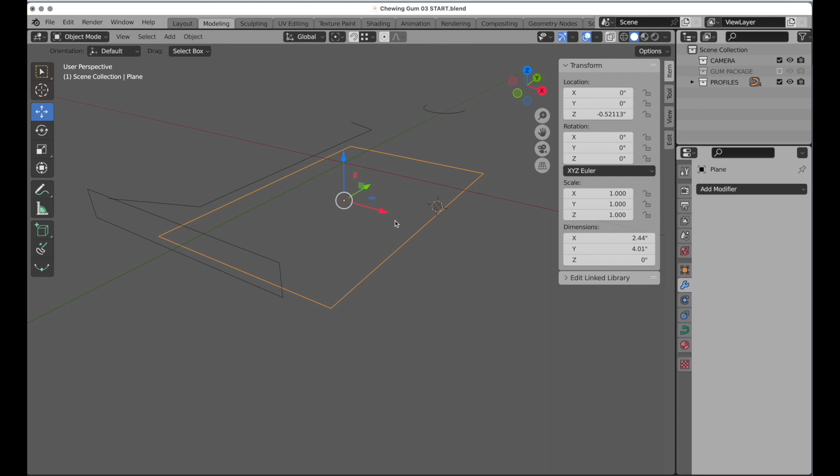So I'm going to press Shift D, then press Escape, and move that up. But what I want to do is come into the front perspective and match this horizontal profile, getting it basically like that.

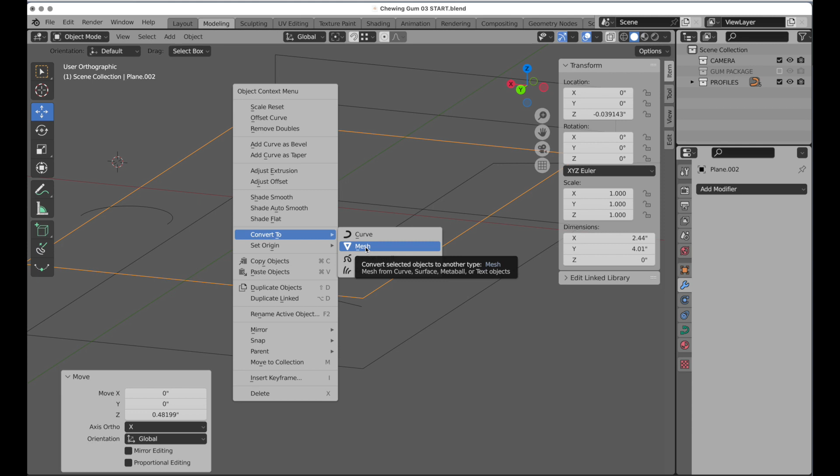Let's bring up the context menu, and we're going to convert this explicitly to a polygon mesh because it's just a closed Bezier curve. Press the Tab key. It's unfilled, so we don't see a fill on it.

So press the A key, bring up the context menu, and come down to New Edge Faces from Vertices to fill that. Okay, come back into Front.

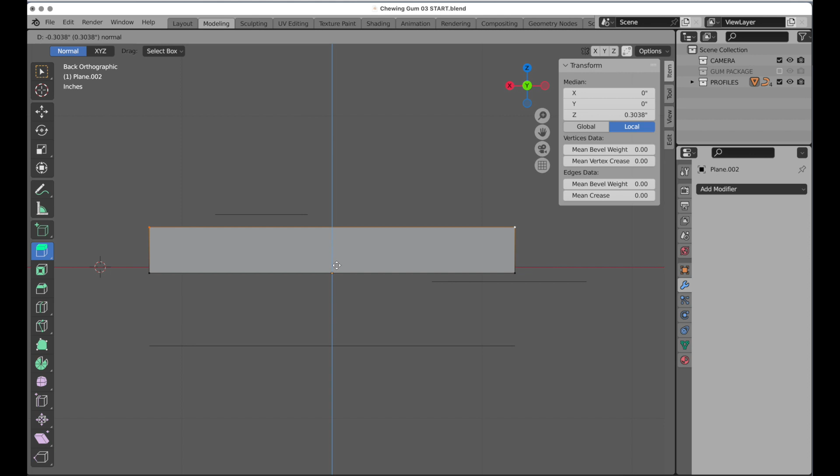Then we're going to extrude this up until it gets to the top, right like that. I'm going to select in face mode, this face, hold Shift and select this face, and then press X because we don't need those, so we're going to delete those.

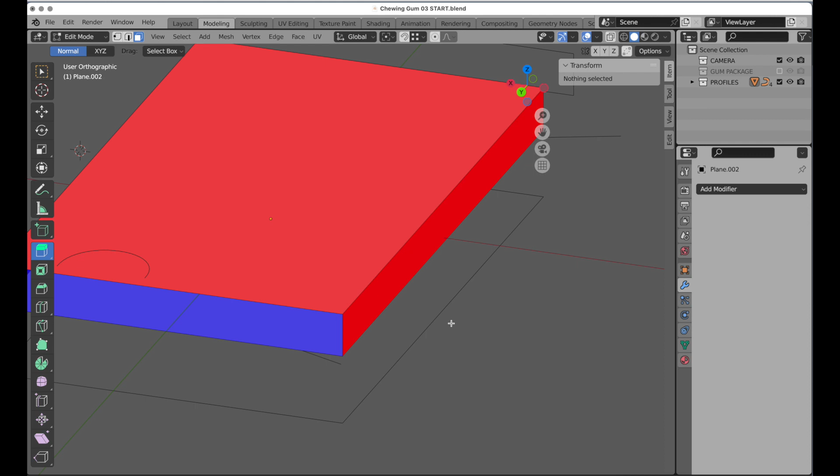I'm going to come over and turn on face orientation. You can see that red means it's going inward, not outward, and we want it to go outward. So I'm going to press the A key, come up to Mesh, then Normals, and flip those to go to the outside.

Okay, let's turn that off because that'll get annoying pretty quickly. So the next thing we need to do is take note of the fact that we have a cutout here that's going to be on both the top and the bottom.

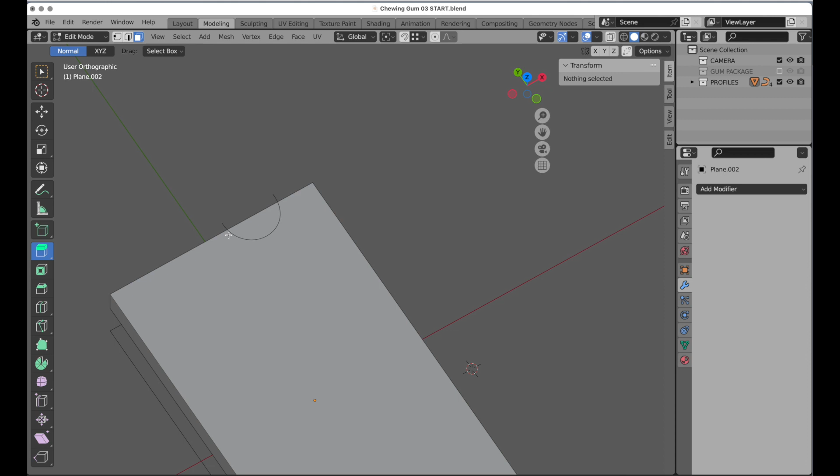If I come into outline and press Option Z, there's going to be a cutout right there. In fact, that profile is hidden—let me turn that on so we can see.

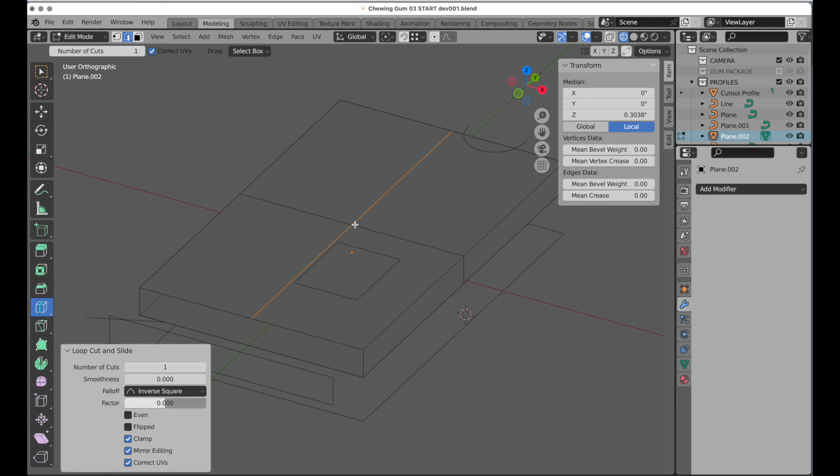So the first thing we need to do is come in and just do some quick dicing up. I'm going to come back into edit mode, come over to the loop cut function, press Option Z again to turn off X-ray. Click once there, there, and then also on the sides.

Now what we're going to do is have some symmetry top to bottom because of this cutout, which is on both sides, but the window cutout here is not going to be on both sides. So we're only going to work on one side for right now.

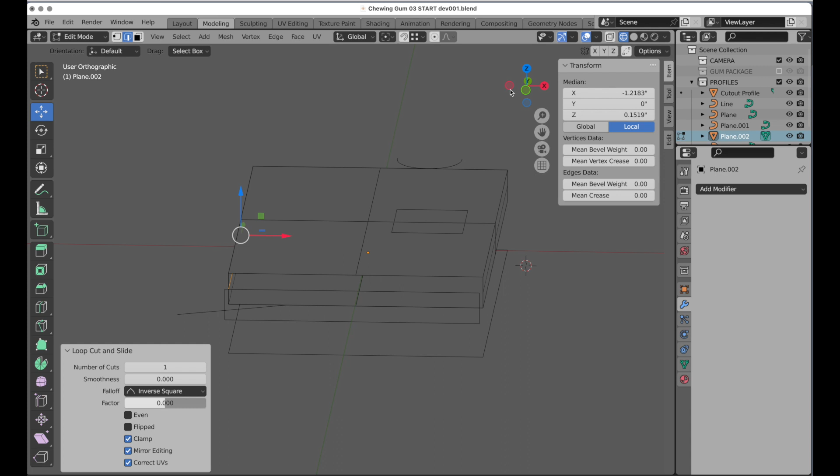So I'm going to come in here, press Option Z again to go into outline mode, and in face mode, select across the bottom faces, then press X to delete those so we only need to concern ourselves with the top. Option Z goes back into regular mode, come back into the top.

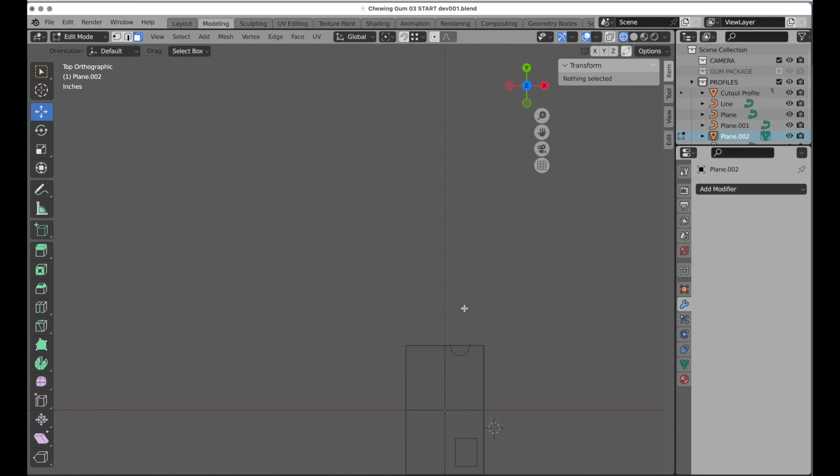And we need to dice this up a little bit more. There's also going to be a slight amount of curvature, and we need to add geometry that allows for that. So let's come back over to the loop cut function, and I'm going to add one there, there. Now let's come over to this side and add a little bit more geometry there, there.

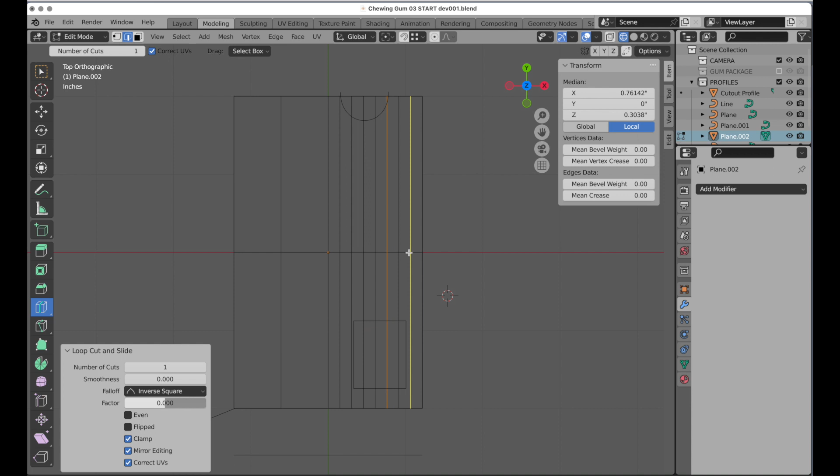We also need to think about the amount of geometry needed up here. So I'll go one step further and add cuts like that, then add two more on that side. In fact, we'll come over here, add one there, and another one there. Then on this side, we're going to cut that up in half, and that's going to be a good starting point.

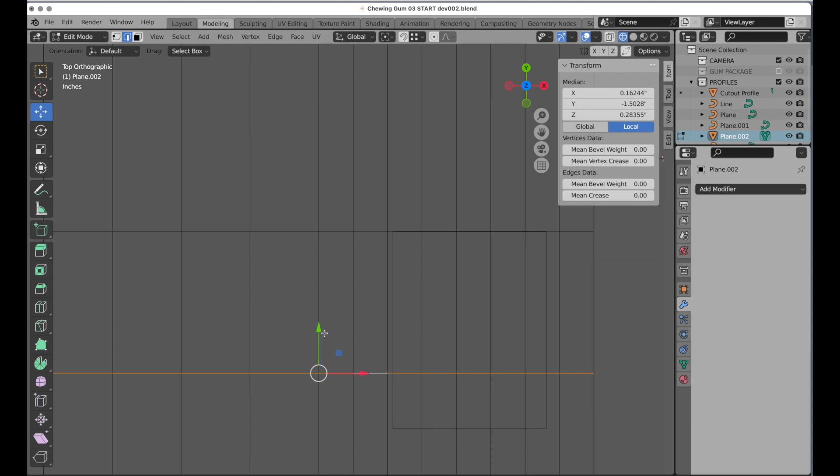Let's come back down to the bottom, and I'm going to take this loop and match it up to the profile there, and this one comes down here. That's pretty easy. Now let's take a look at this.

We're going to use this loop to help partially form this curvature right here when we cut that out. So do we really need to concern ourselves with these being perfectly distributed? Probably not too much. So I'm just going to grab that and move it about like that.

And we'll do the same thing here. We can make a decision on whether we want this one—I think actually maybe I'll move this one instead, since it's slightly closer.

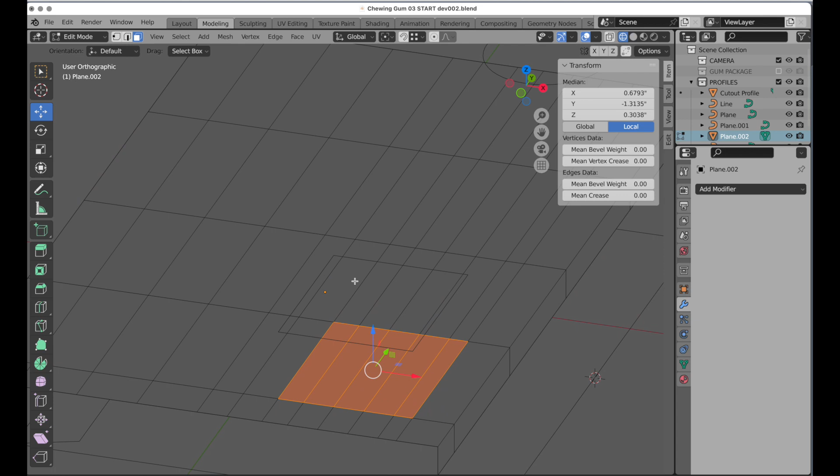Then I'm going to come over into face mode, and I'm going to remove these—these are the ones that we don't need. X key, and we're going to delete those faces.

And there is the little window that will show the gum in the background. I'm going to press the Tab key and remove that since we don't need that anymore. Tab key takes me back in.

Okay, so let's come back up to the top and let's start forming this.

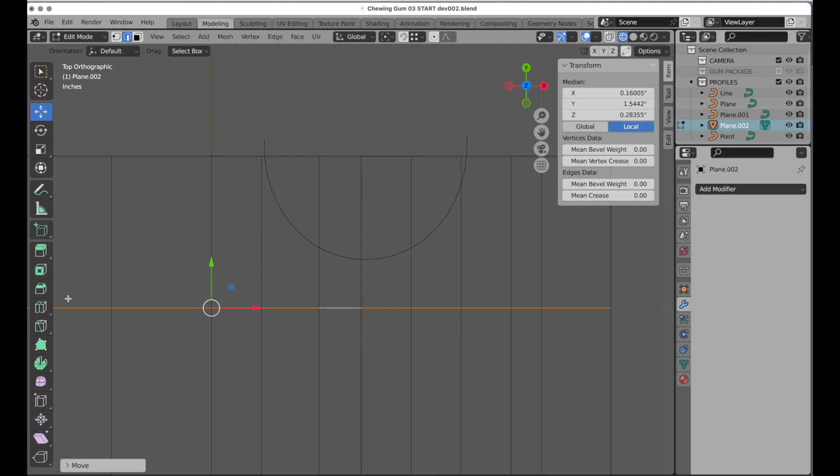I'm going to take this loop and move this a little bit closer, like that. Next, I'm going to press the K key and roughly cut this out. I'll place a point right there, and right there, and right there, just roughly getting that in. Hit return. Then in face mode, we'll select these, press the X key, and delete them.

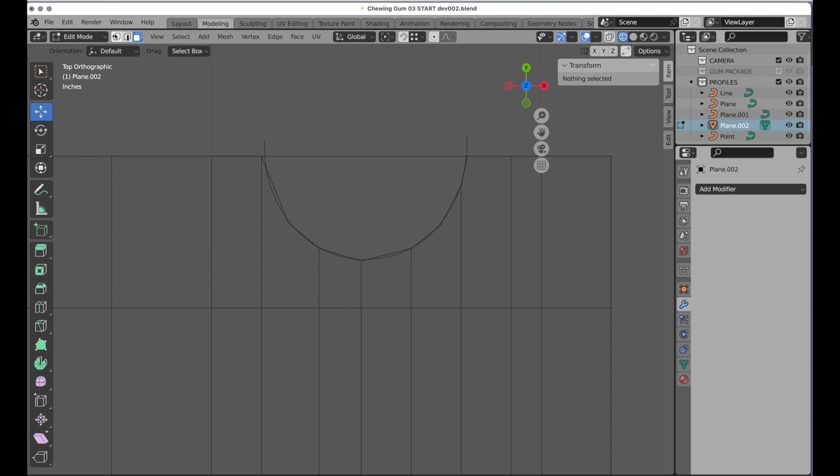The cool thing about this is that we don't need to get perfect here, because the subdivision surface is going to give us the curvature. I'm just going to roughly form these. My goal is to move it so that the center is generally on the profile. So we'll take these and move them down about like that.

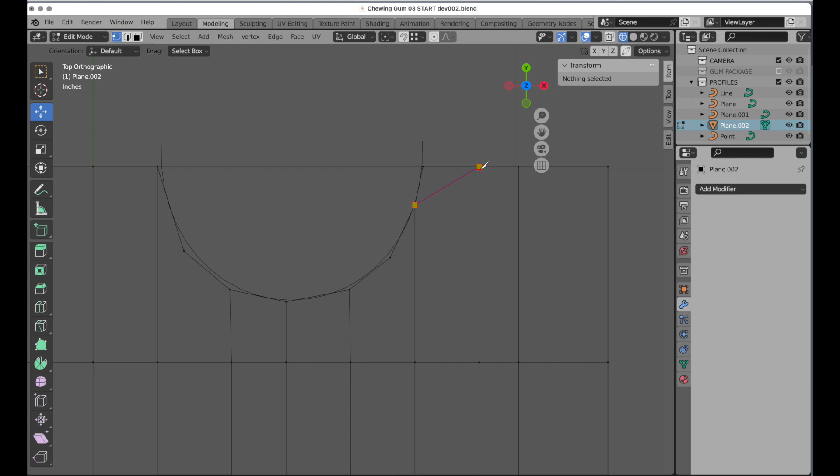Then this one over here, we've got this extra thing, so we can anchor that. I'm going to press the K key and anchor that over like that, and that's good. Having a triangle inside of a quad-based subdivision surface here and there isn't a big deal. I'll press the K key again and do the same thing, anchoring it there. Then K key, and I'll do that right there also.

We'll do a little bit more forming work, because again, the center of the edge is what I generally want touching the curve template profile. Now if you look right here, I think we could probably add another cut right there. I'm going to press the K key and anchor that right like that. Then I can move that down a little bit more, closer to the template.

That works. We're going to have very subtle curvature on the top, so we have some freedom with having these be slightly irregular. It's not something I'm going to get too bent out of shape about.

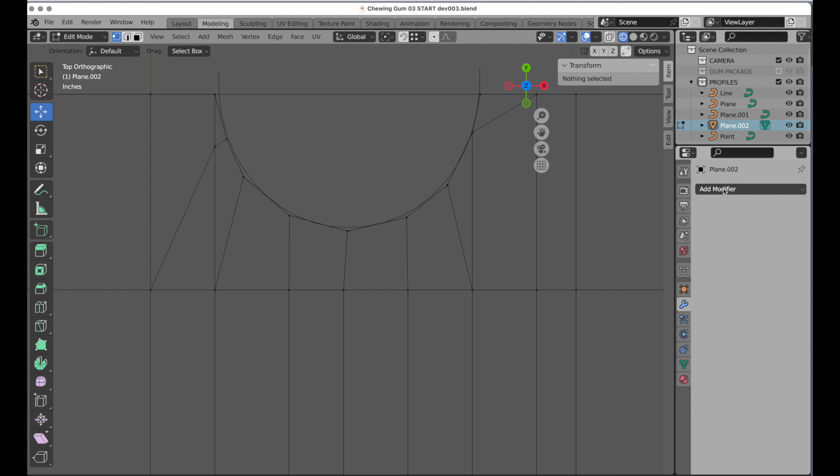Now we can turn on subdivision for this object and take a look at that. We'll come over to subdivision and take this to a value of 2 so we get a little bit better representation. That gets us pretty close.

Let's take this point — we want those not to be subdivided through. So we're going to come over to vertex crease and just mouse to the right until those snap into place. That works pretty well, pretty close to what I need it to be.

We can turn off optimal display, which doesn't show up until you leave subdivision, and you can kind of see how the subdivided polygons form. Okay, good enough. So let's do this.

I'm going to press the Tab key again, and I just want to remove that. So I'll press X. We'll come back over here and turn back on optimal display. Let's refocus over here.

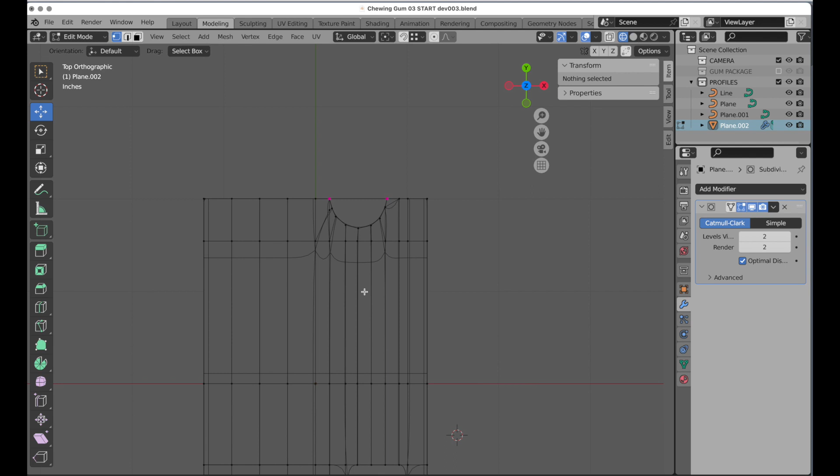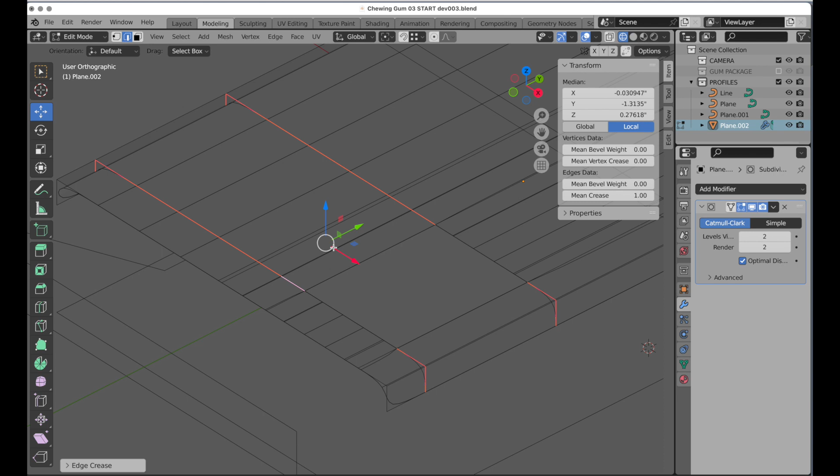What we want to do is make sure this isn't rounded — we want it to be perfectly square. So I'll come into edge mode and select these loops. We're going to press the E key and mouse until those become fully sharp creases, until this crease factor becomes a value of 1.

Now that we've gotten this done, we want to come in and add geometry that constrains the rounding of the subdivision right here. Back in edit mode, we're in edge selection mode, so I'm going to double click this edge loop, hold shift, and double click this other edge loop.

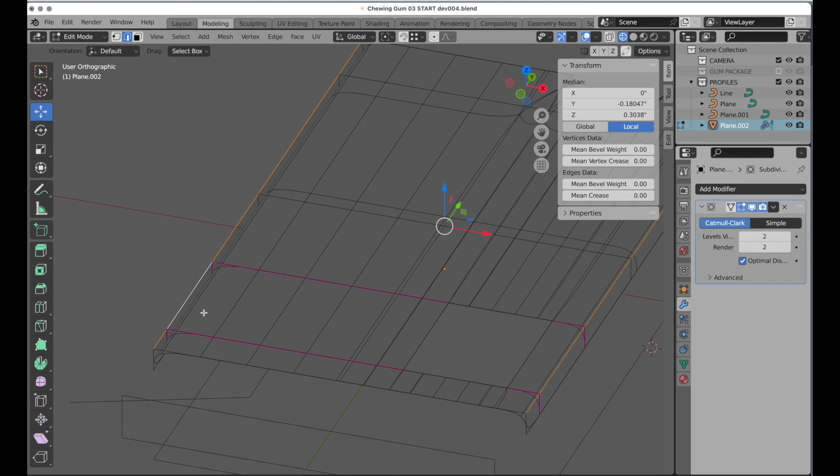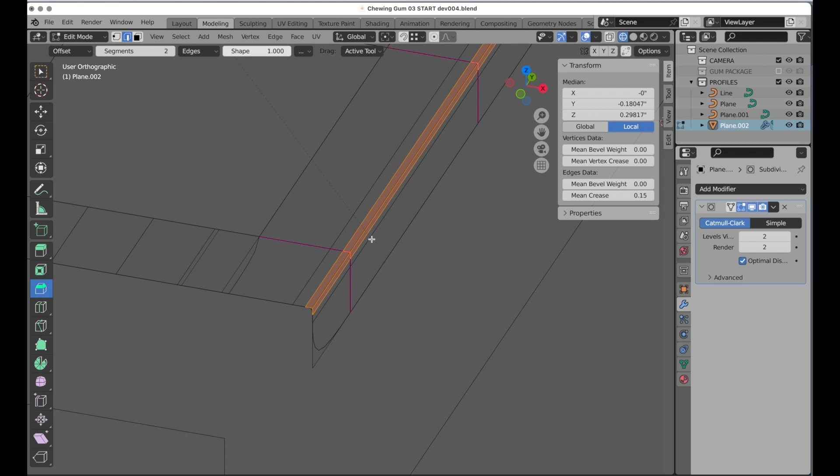Let's zoom down and come over to the bevel tool. We want it to be 2 segments with a shape of 1. I'm going to switch this over to active tool, which makes it easier to do this operation — click, hold, and drag on any place, then just begin pulling that. You can see that gives us a little bit of rounding that's constrained, and that'll work pretty well.

So now we can just look at this in shaded mode and see that. Okay, so there we go — that's working pretty well. Now let's do the other side.

So we're going to come into front view, and I'm going to turn off subdivision temporarily. Now, in order to mirror this, we need to get the object's center exactly here, so that when it mirrors, it'll do it correctly.

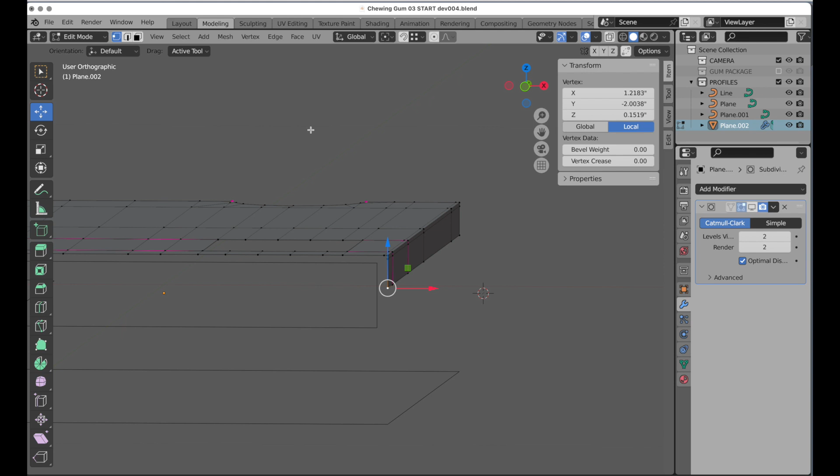So I'll go into edit mode, vertex select that vertex, come to Shift S, and do cursor to selected. Leave edit mode, then switch back up here to object and do set object origin to 3D cursor. There we go. Now when we come over to the mirror function, we can add a mirror modifier.

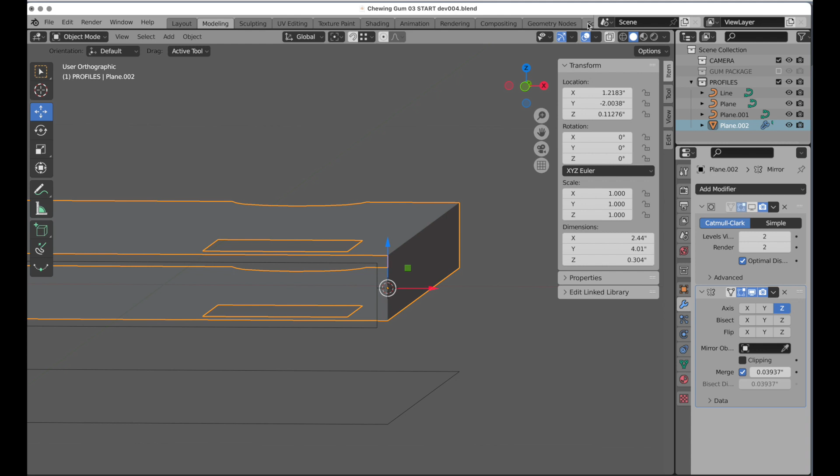Right there, and we just need to change it to the z-axis, and then it'll mirror around that point we just moved. So that's correct. Okay, let's come back over into wireframe so we can see this. What I want to do is permanently apply this, since this is something we don't want as a modifier because we need the geometry to operate on. So we're just going to apply that.

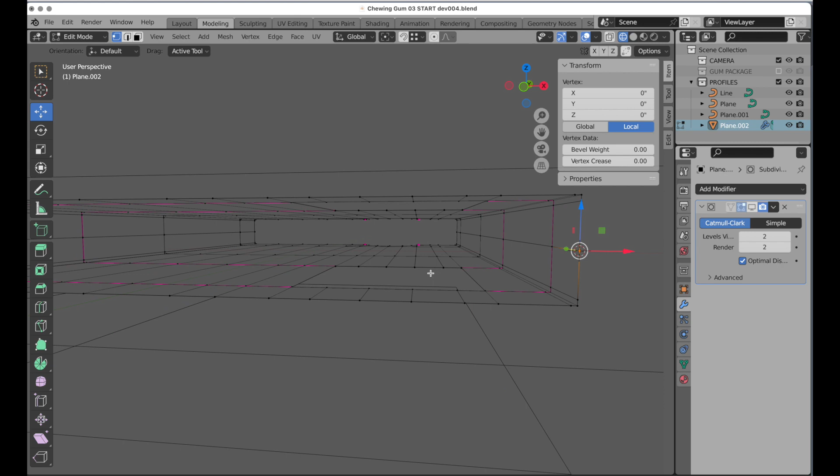Okay, so let's come back into edit mode. I'm going to turn on perspective to help visualize this. We don't need this one on the bottom. So come over into edge mode, double click around that and it'll select that perimeter. Hold the shift key to deselect these two edges, bring up the context menu and then bridge those edge loops.

And then we need to continue these hard edges. So I'm going to double click those hard edges there, hold the shift key, double click these, and then press shift and E, and just scroll left to right, making sure the factor is 1.

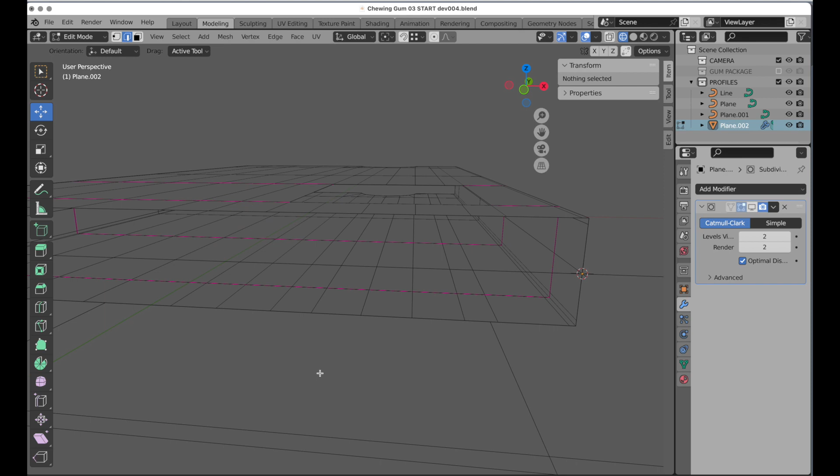And there we go. Let's come in and remove all these profiles that we've got going on. There's only one that we're going to retain for right now. Let's remove those, and it's this bottom one that's going to give us a sense for a flap that folds together. In fact, let's turn our attention to the flap next.

I'm going to come into the front. I'm just going to move that down a little bit. Okay, now what I'm going to do is also bring the 3D cursor and put it right there, so that we can focus on that area.

Okay, tab key goes into edit mode. What I want to do is dissociate this edge, because the flap is going to come down and inward and glue to this lower piece of paper, whereas right now it's a continuous loop of polygons. So this is what we do.

We have down here a rip edge function. We're going to do this in edge mode. Now the way this works is that when we have this loop, it's going to take into account where our cursor is on either side of this. So if I come above it and press the V key, it's going to rip that polygon on top.

What I want to do is only move it up along the Z axis. So I'm going to press the Z key, then double click on this loop, and bring this up a little bit higher like that. Double click here again, tap the E key to extrude, tap X to only come in that far, E key again, X. Okay, now let's come back into the top view without perspective.

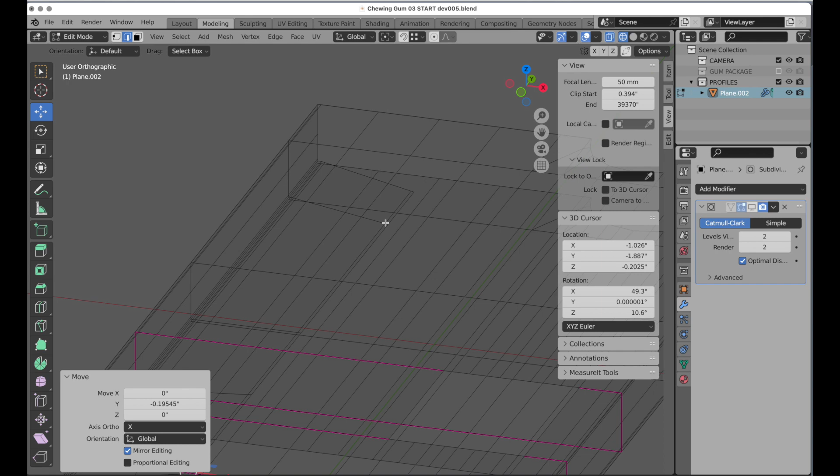Option Z. Take that edge, we're going to move that one closer there, so that when we subdivide this, we'll have these nice little rounded corners at that point. Okay, so there we go. Option Z.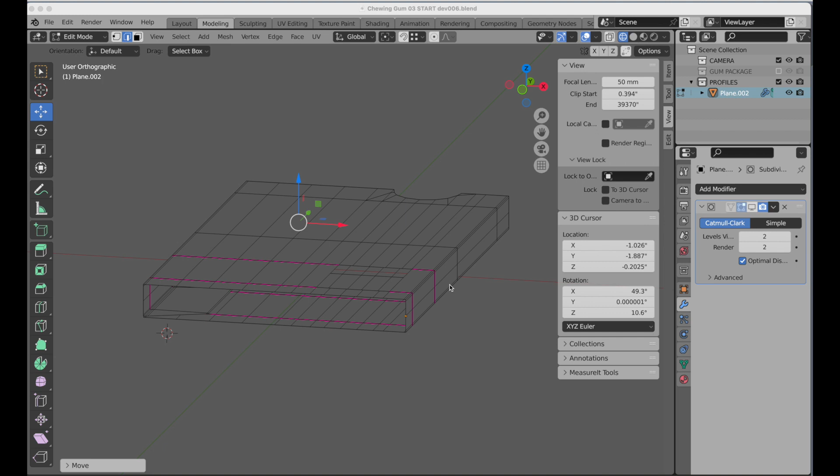Okay, so what we're ready to do now is add some thickness to this and assign some materials and give it a deformation lattice. Let's come in first and UV map this. So we've got this complete enough that we can UV pretty easily, and this is going to be a fairly easy shape.

To UV map. And since it's open, it's no longer a closed surface, we don't need to put any cuts in there. So I'm going to press the A key, select all the polygons, and then we're just going to come up to the UV editor. We're going to tell it to unwrap.

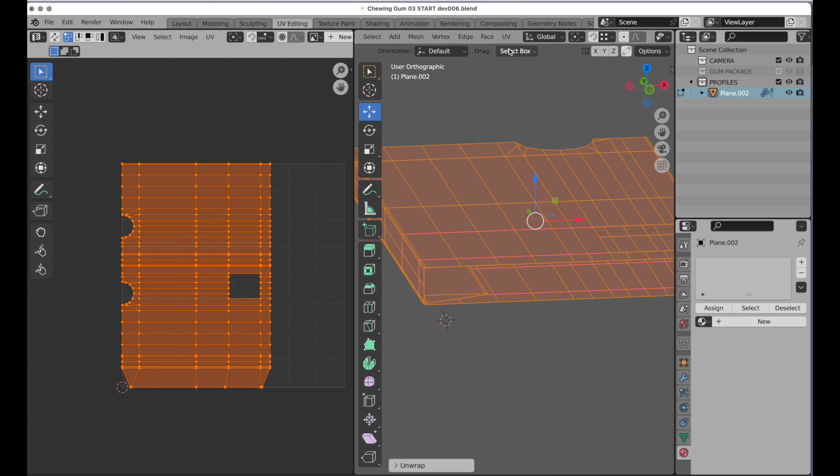So let's come back to modeling, and now we just want to add some thickness to this. So we're going to come over now and add a Solidify modifier, and that's going to be enormous by default. Let's type in 0.008. Okay, there we go.

And you know, that's something you can play with in terms of the thickness that you need, but we can come back in and turn on subdivision, and we can see how it kind of produces that nice organic rounding right there.

Because what we need to do is have a material for the outer label, the sleeve, and then the white paper that it sits on, which is going to be the thickness in the interior paper. So we're going to add 2 slots, and the top slot we're going to call sleeve label, and the bottom is just going to be white paper.

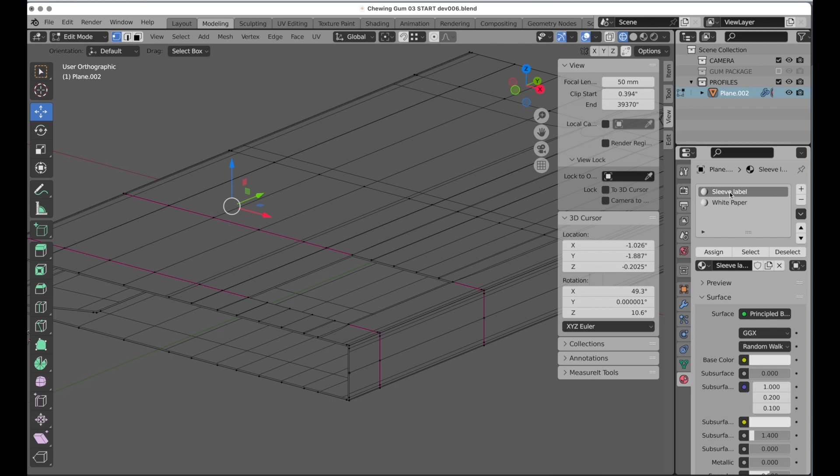Okay, so here's how this works. Let's make this really obvious. In fact, let's switch over into a shaded mode. By default, the top one is going to be what has applied to everything, so we're going to make this apparent by assigning a color. So that's really clear. We want the bottom white to be on the edge and the interior.

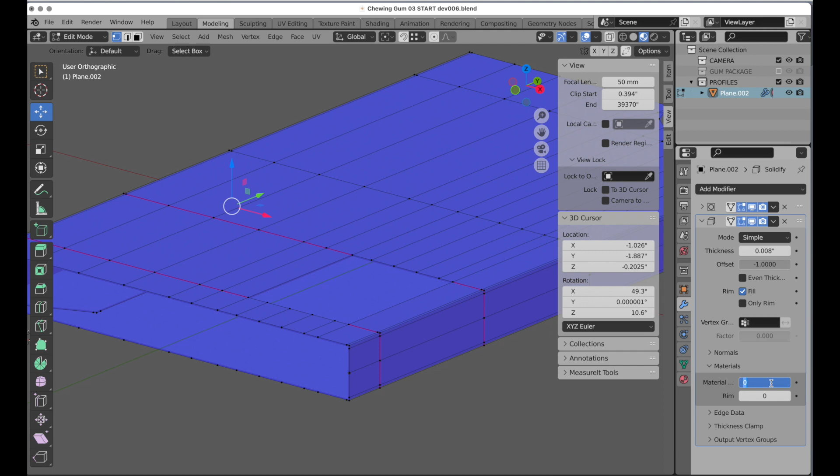So we're going to come back here to the modifier stack, and we're going to come down in the Solidify to materials, and we want to put in a material index of 1 and watch what happens. A value of 1 tells it to use the first material in the material stack underneath the top one for the generated thickness component. Pretty easy.

Now you can see for the thickness here, we do have the label also. So we need to come back here, and we need to also give the rim a value of 1. So that's how that works.

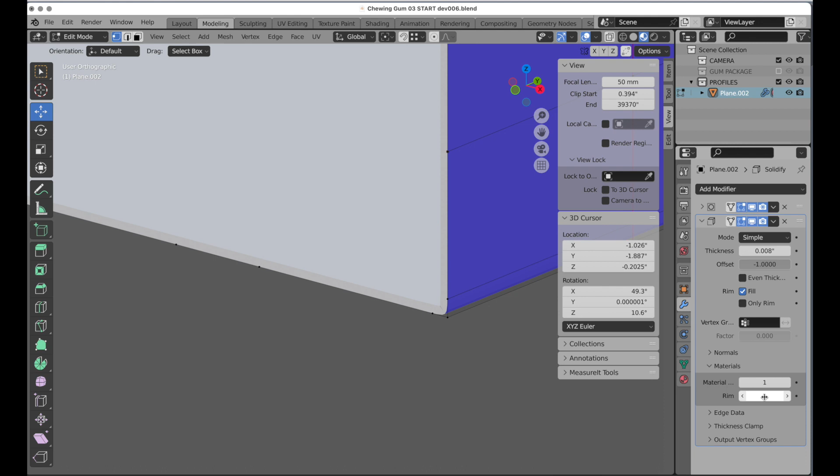Okay, so let's prepare this for the lattice. In fact, what I'm going to do is I'm going to leave edit mode. We're going to come back into front so we can see this. And I'm going to return the origin to geometry so it's right at the center. And actually, you know what? There's one other thing I want to do.

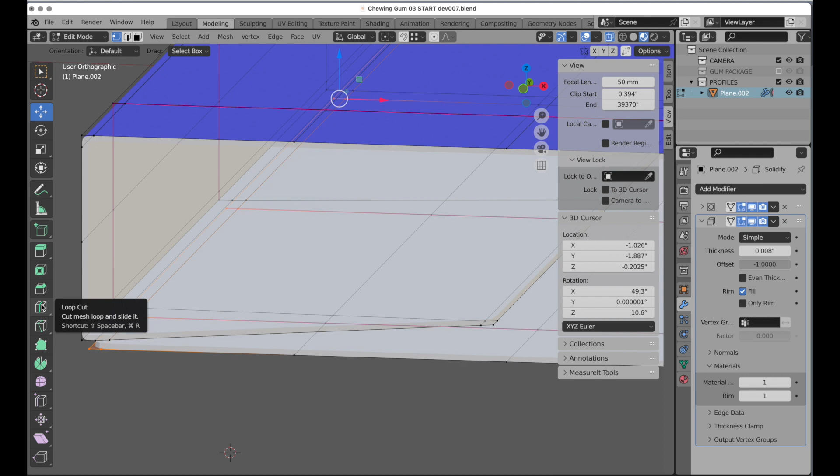The flap right here, we need to add a little bit more geometry. So I'm going to come into the loop cut function and add one more loop right in the middle, because we are going to be deforming this, and it would be good to have a slight extra piece of geometry there to work with.

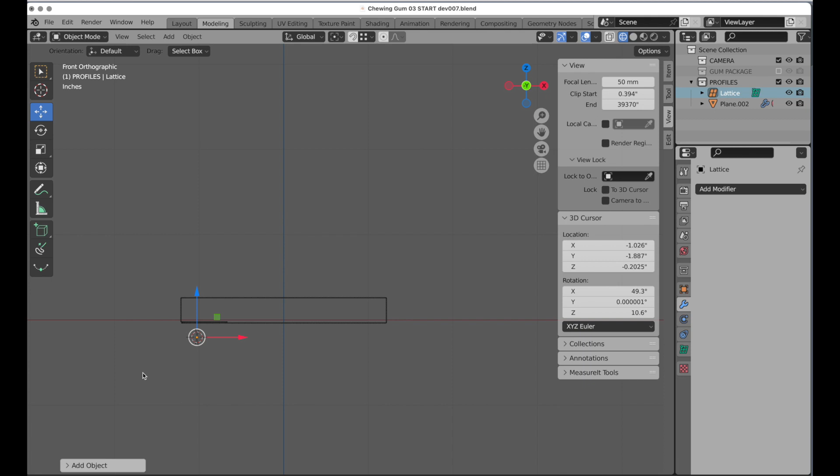Okay, tab key leaves, come into the front view, shift A to add, and we're going to add a lattice. It's going to, I don't know why that's there. Let's come over. Oh, it added it where the cursor was. Okay, so let's do this. Shift S, cursor to selected, and there it goes to the object's origin at an object level. Shift A, we're going to add that lattice.

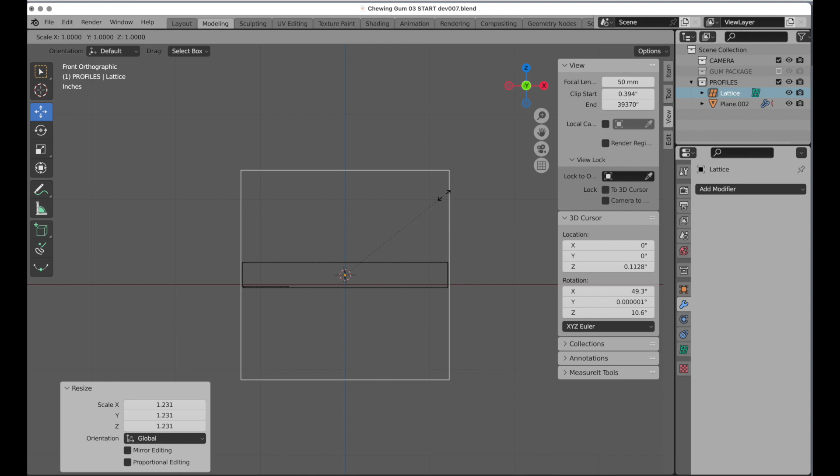It's going to be enormous by default. Let's just type in a value of 2. And here's what we do: we press the S key and start scaling it until it just barely encompasses the object. S key again, but in this case we're going to tap Z and bring that down so it's pretty close to it. And then in the top view, S and then Y, and we're going to take that so it's just outside of it. Now, this is one of the few instances where you do not want to apply scale. You want to leave that as it is for it to work correctly.

The next thing we need to do is come down here to the lattice object data entry, and let's type in a value of 7 this way, and a value of 3 and 3. Okay, that gives us enough resolution to work with. So I'm going to move this outside of profiles, and I'm just going to rename this sleeve. There we go. Okay, and we're going to call this

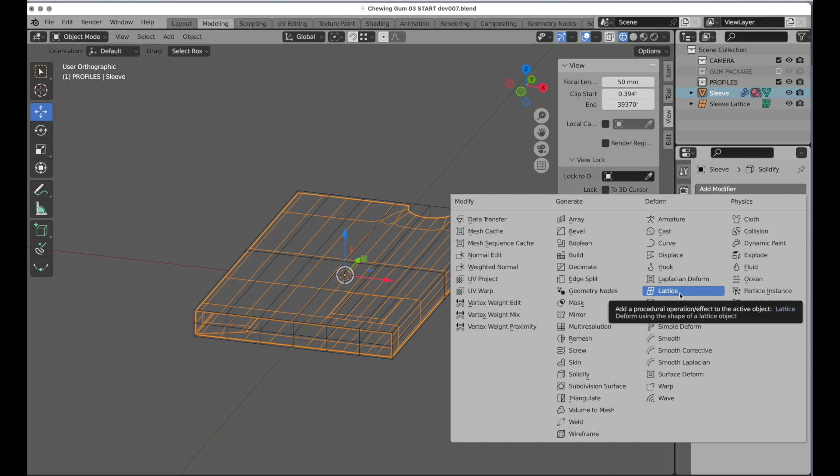sleeve lattice. Okay, so in sleeve, we need to come here and we actually need to tell it to add a modifier to hook it to the lattice. So we're going to come here, hook it there, and then we're ready to deform it.

So we select the lattice, tab key takes us into edit mode. And what I'm going to do is marquee across these center ones, S key, and then the Z key, and we're going to move those up just like that. Just because when I had the physical product, it had a little bit of that bubbliness to it, if you want to think about it like that.

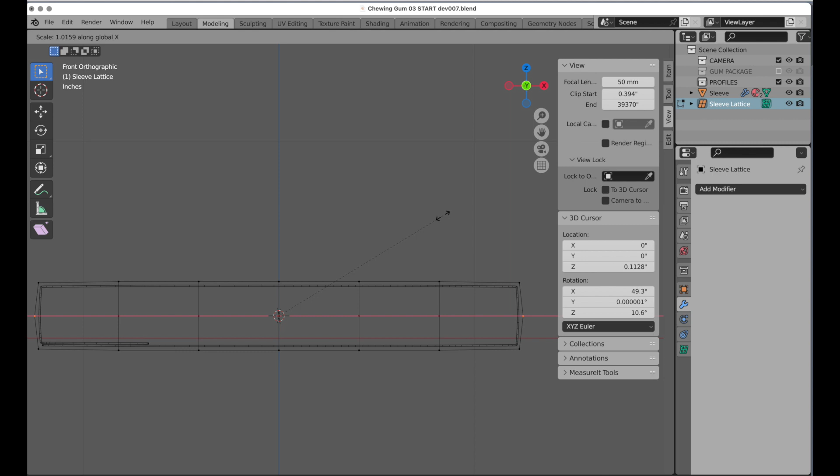Take this over here and this over there, S key, and then X, and we're going to pull that out just a little bit like that to give it rounding. Okay, so that's why we came in and added the extra bit of geometry here, just because there's a slight amount of deformation to that area.

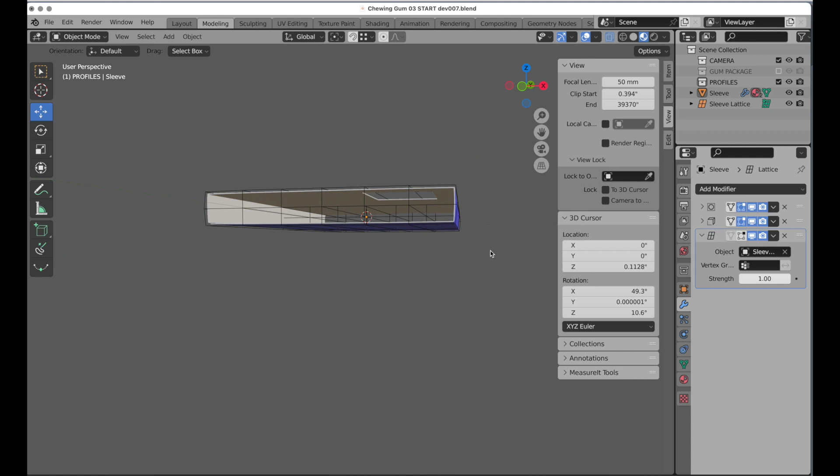Okay, so there we go. And pretty much done with this segment. Let's come over and preview that. And there we go. So that wasn't too difficult to model for the sleeve component.